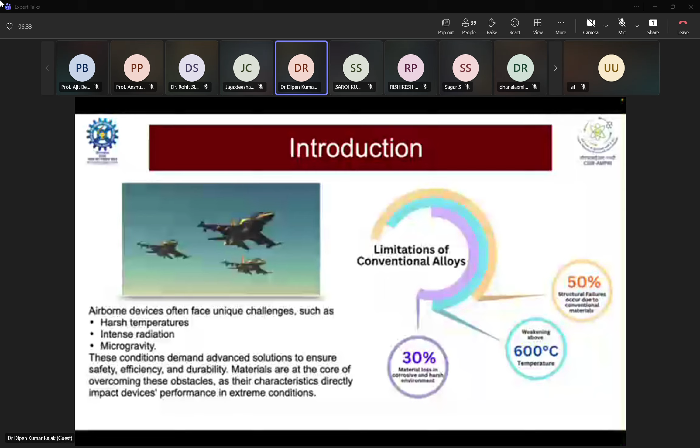So this time, let's look at what we are looking for and what kind of problems we need to address. Conventional alloys are not qualifying, approximately 30%. Based on the literature, there are 30% material losses in corrosive and harsh environment effects, because due to temperature changes in aerospace, aircraft or spacecraft materials, due to sudden temperature changes or atmospheric moisture or dryness, they undergo corrosion and harsh environment effects. So 30% of alloys get disqualified based on this, and they weaken above 600-degree temperatures.

Beyond 600-degree temperatures, if they are used, there are a lot of difficulties. So nowadays we have to think about developing materials that can sustain above 600 degrees Celsius, like high entropy alloys, because it's a combination of different alloys or elements. We have the capability to develop alloys that can survive or sustain around 1500 or 2000 degrees Celsius.

50% of structural failures occur due to conventional materials, because they have very different properties, and those properties cannot sustain harsh conditions. We can say that at higher temperature sites, once it reaches the higher temperature threshold, the materials are going to fail.

So the basic principles are very clear and we know them, but it is a very basic principle. Once we talk about mixing particular properties, there are pure substances and mixtures. Elements and compounds are different parts - this is pure substance. Mixtures are homogeneous and heterogeneous.

We have to focus on homogeneity, and there are the following properties we have to take care of: the atomic size of the elements, what kind of atomic size we are considering, bonding natures and chemical compatibilities, as well as density. Density is a very important parameter during mixing properties, because based on density we decide these material properties.

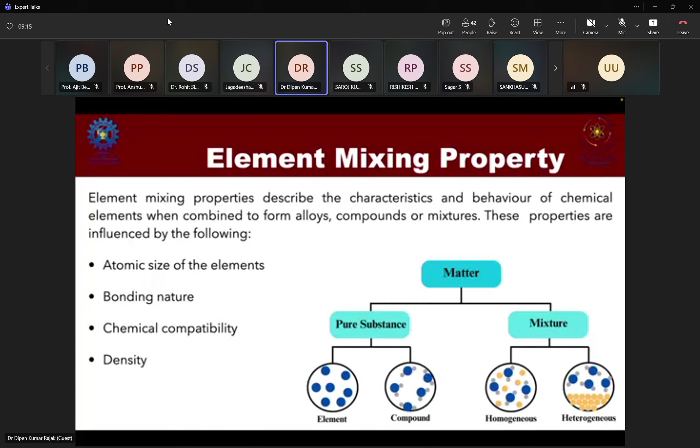And their ranges, whether it is low entropy alloys, medium entropy alloys, or high entropy alloys.

Let's see the type of materials being used in spacecraft or space structures. These mostly exhibit high strength-to-weight ratio, and have thermal stability as well as resistance to harsh environments.

This systematic diagram has been taken from the Voyager spacecraft structures, and we can see how these small components are fabricated, and those components have to sustain high temperature environments. Without sustaining high temperature environments, it is not possible to survive.

For that, what kind of materials do we traditionally use, either titanium alloys or carbon fiber composites. So these combinations of metals or non-metallic materials are designed and used in structural materials.

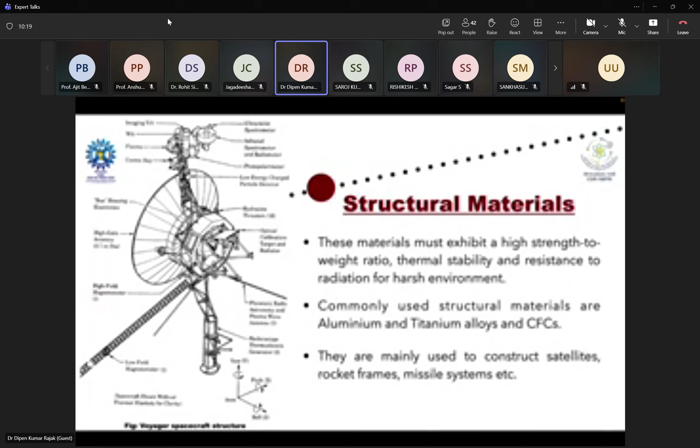Let's see - thermal protection systems are very much required once we talk about high temperatures, as well as when we go to other conditions, there are different temperature variations.

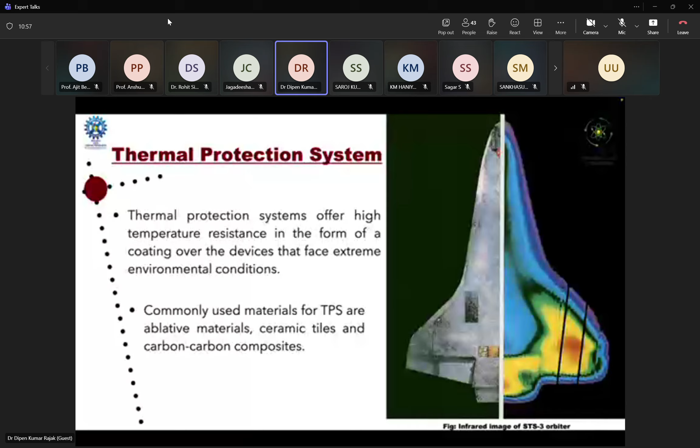At ground level, there are different atmospheric temperatures, gravity, and temperatures. Once it is in the air, there are slight differences - we can't say it's very big changes in atmospheric pressure, gravity, as well as temperatures. So we have to take care of thermal protection systems.

Now another point is once we talk about high temperatures, we have to look at radiation resistance materials. If the radiation is not within a reasonable or sustainable limit, it becomes very difficult.

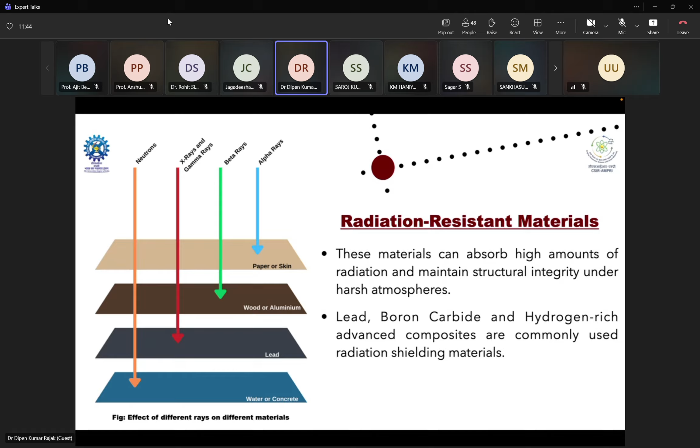So we have to take care about the radiation part also. Here you can see there are four layers. I'll give some examples of putting these things - paper or skin, alpha rays and beta rays, gamma and neutrons - how these four layers like water or concrete are going to resist the radiation effect, absorbing this particular radiation effect.

Now we will look into the materials journey, from the 19th century to this current scenario of 2026. There are segments I have kept showing how things are going on. So sometimes you may see 20 years, or sometimes up to 30 years or 10 years. These are the alloys being used in the initial stage of the space aircraft or space industry, as well as spacecraft or defense.

They are using a different kind of alloy. So in 2010 and beyond, they are using shape memory alloys, and they are likely to adopt high entropy alloys for their betterment and new sustainable materials applications.

We can see here, property wise, their functional adaptability is very easy for this particular high entropy alloy, and they are having challenges because the high entropy alloy development challenges are manufacturing complexities and the high cost.

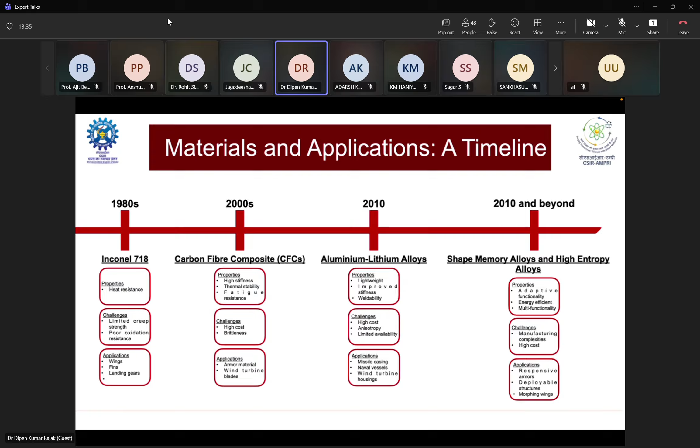So these two parameters are the challenges, but apart from that, in terms of applications, there is very large scope for deployment of high entropy alloy in defense, aerospace, automobile industry, and marine engineering. So these are the timelines which were used.

But now we'll have a look into high entropy alloy as a futuristic material. Generally, the concept is that a pure metal will be having a single best pure alloy - either aluminum or magnesium or nickel, copper, iron, chromium. These are single best alloys.

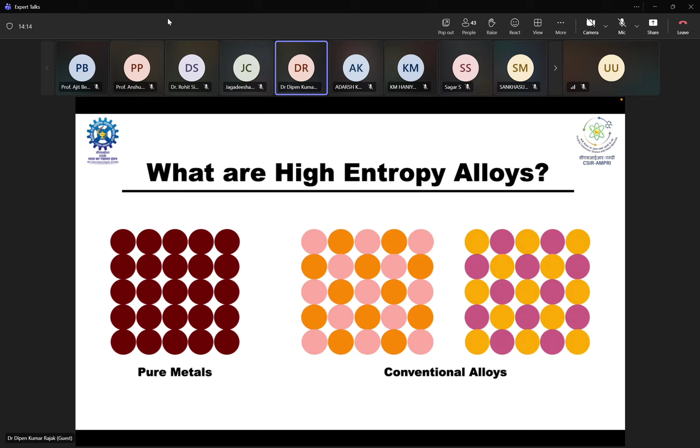But in terms of high entropy alloy, we can see there are conventional alloys, and once the conventional alloy and pure alloys mix together, they can form different alloys. That will be the newly introduced alloys, the high entropy alloy. Initially, the Cantor alloy is very famous for high entropy alloys because the Cantor alloy has combinations of five elements, and it has very good properties. So whenever we talk about high entropy alloy, we always take the reference of the Cantor alloy.

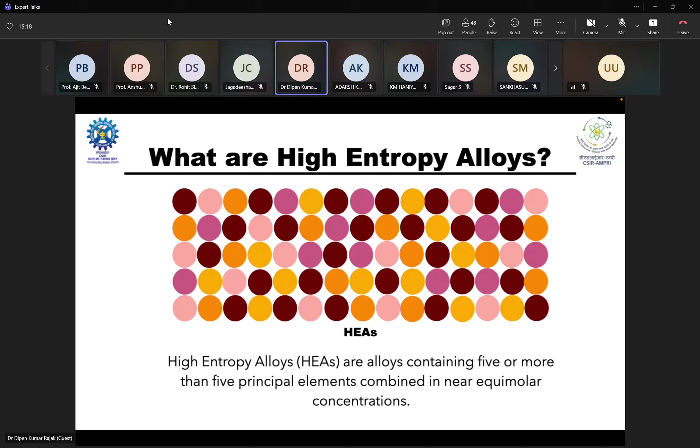So you can see the basic five principal elements or more should be there for it to be considered a high entropy alloy. Not only that, sometimes there are chromium, iron, and nickel involved. These three alloys can be approximately 75%, as authors have recommended, and they put forward the term high entropy alloy. So exceptionally, even three alloys can be considered as a high entropy alloy, and there are different points regarding density.

Why is the high entropy alloy so popular? For that, we need to understand this comparative chart where we can see the figures, the plot in graphs. It is taken from around 300 research articles or review articles - a combination of reviews, research, short communications, and a few patents - and we concluded these things. High entropy alloys have a variety of properties, because a single property alone doesn't make it popular. It comes with different identity, different properties, and these different properties make it unique. So these combinations of varieties of properties make it a different level of alloy.

So basically, once we talk about things like inconel or titanium or magnesium alloys, in terms of their capability, the yield strength - you can see here inconel alloy starts at approximately 850, while the high entropy alloy reaches approximately 1200.

The relative wear resistance: the baseline is one, but here it's 2.5, so higher than the conventional alloys, with much less degradation compared to conventional alloys. I focused on only a few properties because these properties enhance aerospace material components, and that's why these three properties are taken care of and kept in this presentation.

If we see how these things change with strength ranging 1000 to 1500 megapascal, in region A and region B, I will represent two graphs. Region A shows strength, exhibiting hardness values and yield strength. Region B shows how substituting density affects hardness and yield strength. So there are two different aspects, density and hardness, and it is directly proportional to the yield strength.

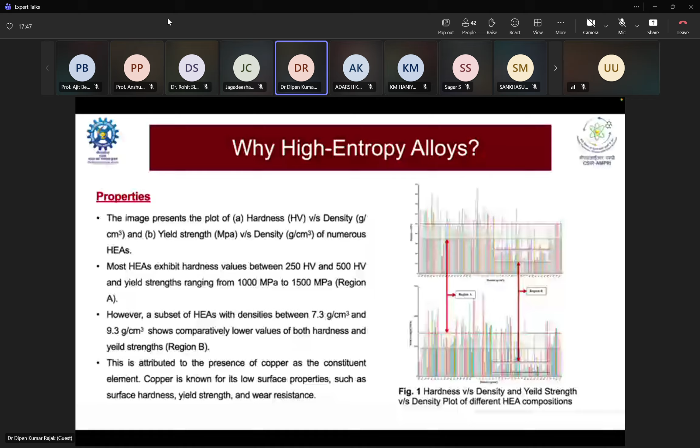Once you choose the high entropy alloy, what parameters do you need to take care of? First, what are their melting temperatures, what is the density, and which segment they fall under, like lightweights or refractory. Lightweights are six: lithium, beryllium, magnesium, calcium, scandium, and strontium. These are the six elements which comprise the lightweight elements.

Next are the refractory ones, with nine particular metals or elements. These nine elements go on to produce the refractory elements, meaning high entropy refractory elements. Then there are the commonly used elements for developing high entropy alloys, and the less used ones, which are metals or elements very rarely used for developing high entropy alloy.

Simultaneously, if we talk about the transition series, these are used for high temperature applications. It requires around 2300 degrees Celsius, or maybe beyond 2400 degrees Celsius, for developing the high entropy alloy in the transition series.

The lanthanides are a different part, different elements, because very rarely do they choose such elements to form a high entropy alloy, since it requires a very specific range of temperatures. Once developed, their properties and applications are not too fruitful. Lastly, there are the rarely used elements for development of these high entropy alloys.

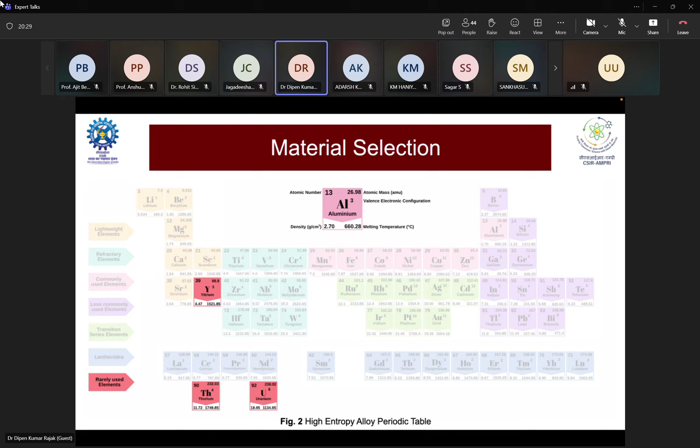Look into this next point: what are the key challenges, as I discussed. In material selection, high strength to weight ratio should be there, because sometimes a higher density can disqualify a material for selection. It should also withstand extreme thermal and mechanical stress, durability against radiation, and resist atomic oxygen. The last important part is the expense, because once you plan to develop from furnace maintenance to raw material procurement, to the final product.

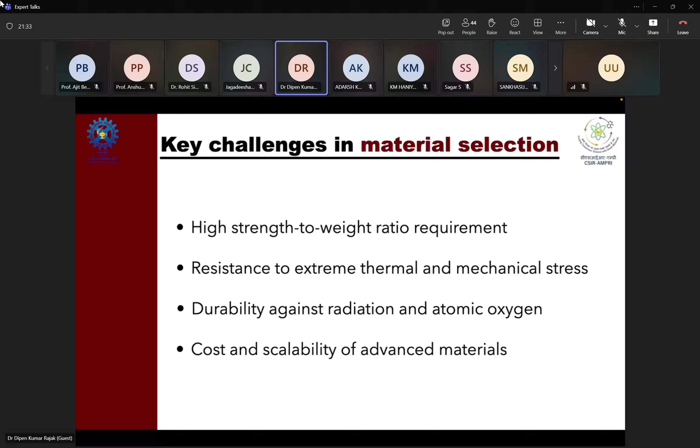You end up developing only a small quantity, or lab-scale amounts, of the alloys. These kinds of things have to be maintained because scalability analysis is required, due to the higher metal costs if you are buying or purchasing them. What will be the effect, or what targeted components are you planning to develop through these developed alloys? That has to be very clearly understood.

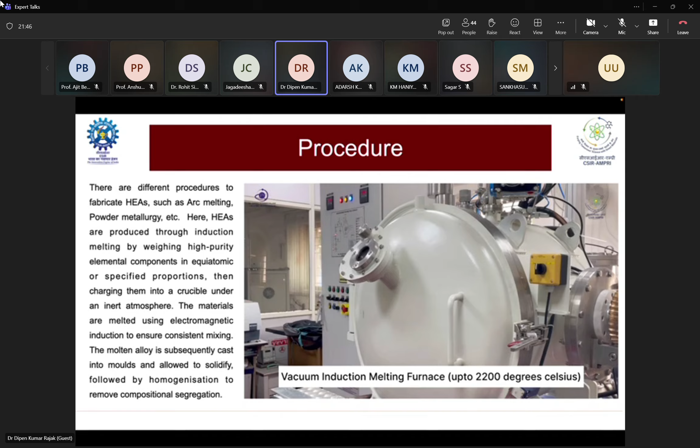Now I am showing you this one small video, just take a look at it. Recently we have installed this equipment, and we have developed a high entropy alloy through this vacuum induction melting furnace.

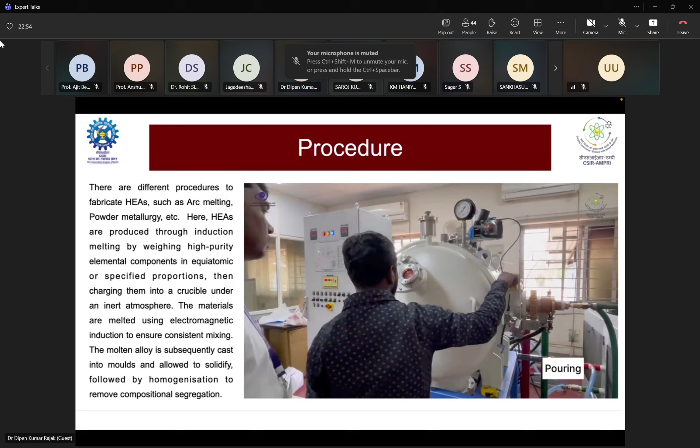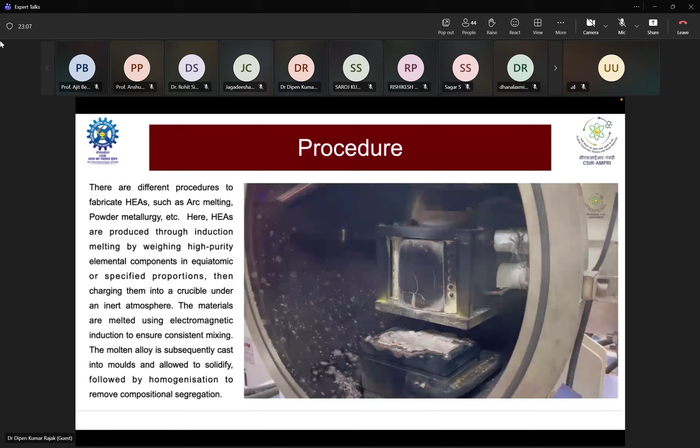We have recently installed a vacuum induction melting furnace with capability up to 2200 degrees Celsius, which can melt high entropy elements across the ranges required for our pilot projects.

Now let's see a few of the results I have just concluded, looking at how the microstructure develops with these alloys, and what effects we can see in the TEM analysis and tensile testing.

Currently it is quite limited because we have kept the maximum portion at 35% aluminum in some cases, with some different tin and zinc also included in the composition.

Basically we need to improve further, because once we develop these high entropy alloys, there are materials above 1200 degrees Celsius that melt in that particular furnace, which will result in different strength characteristics.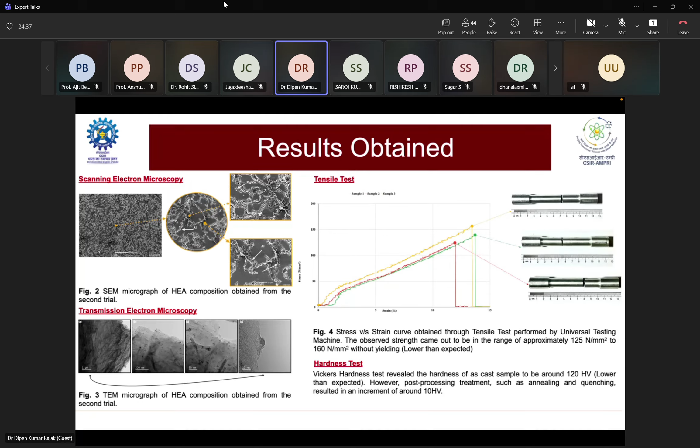This is just for screening purposes, as one example, since it is a lightweight high entropy alloy based on aluminum that we have taken care of.

Now let's look at the market size of high entropy alloys and what kind of work needs to be taken care of, looking at the complete market size.

There is a very good market size for high entropy alloys, and the latest research is being done by very good universities. India also has good academic and laboratory work in this field, with scientists working on this development, but we are facing some challenges.

We need to sort out these challenges, and there are some tentative solutions we are looking for regarding the problems, including the production and manufacturing complexity.

Development of cost effective bulk production techniques is required for this. There is also the complexity of governing the effects of high entropy alloys, since there are four core effects we need to take care of.

There are computational modeling techniques, the CALPHAD method, which we can use with software analysis. Using this we can simulate the high entropy alloy mixtures and get tentative ratios and their effects, then proceed to real product applications or production of these alloys.

There is a requirement for precise methods to identify composition for industrial use. AI driven tools are nowadays coming into this market, and using these we can explore unexplored applications despite extensive research already done.

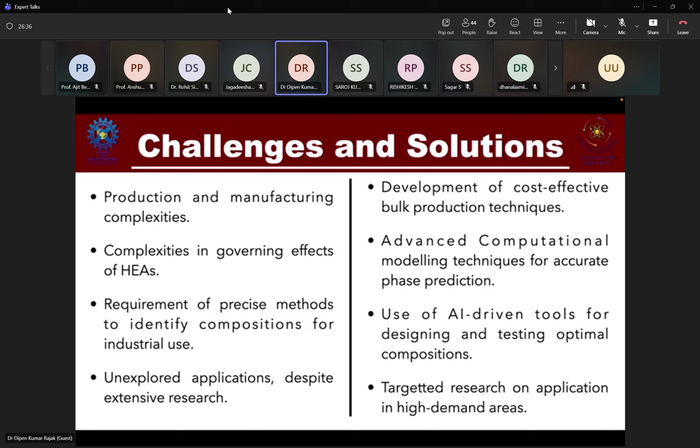There is a lot of white space, so we have to find the gray areas in these applications for our conclusions. If we can contribute a component based on high entropy alloys, that will be the biggest contribution for this industry, automobile sections, and more.

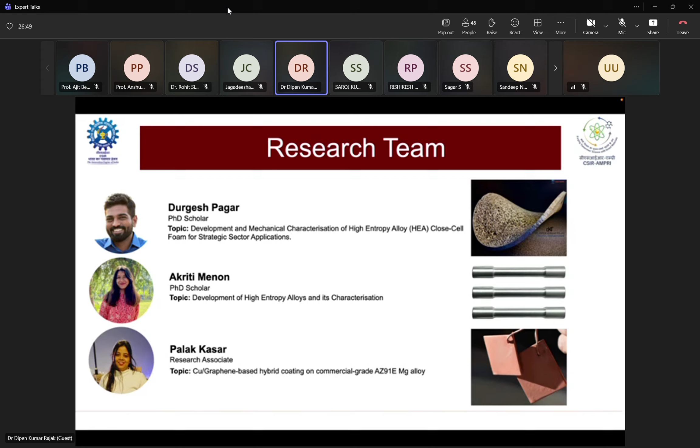I have this research team, and there are other research teams as well, but they are not working in metals, they work in ceramics, basically synthesizing SiC. These are the basic profiles, and I hope this time is very good for us.